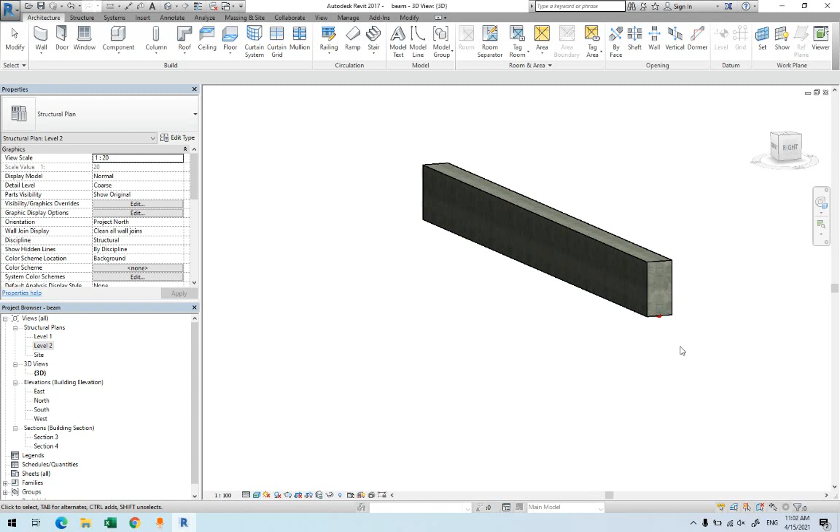Now for this example, for this purpose, we have a beam. Doesn't matter if there's column or other things, we're just trying to place that reinforcement. We have a beam here. Let's say this is the end of the column, this is the end of the column. So let's say I can place

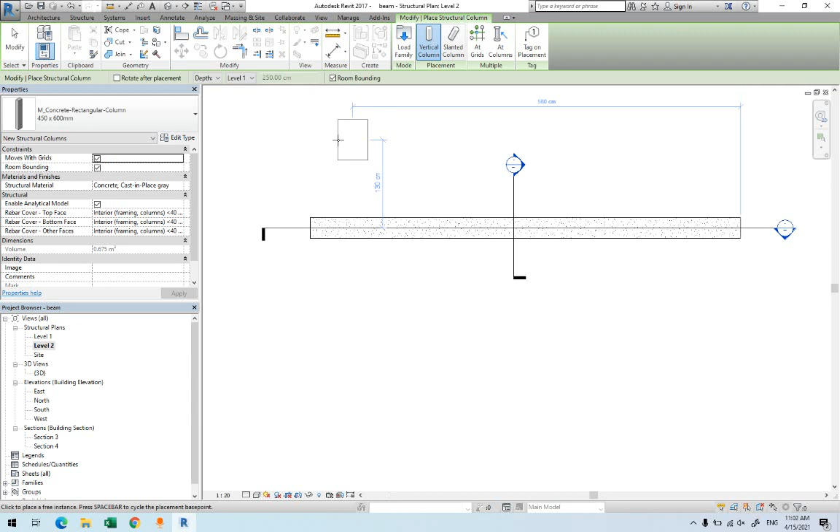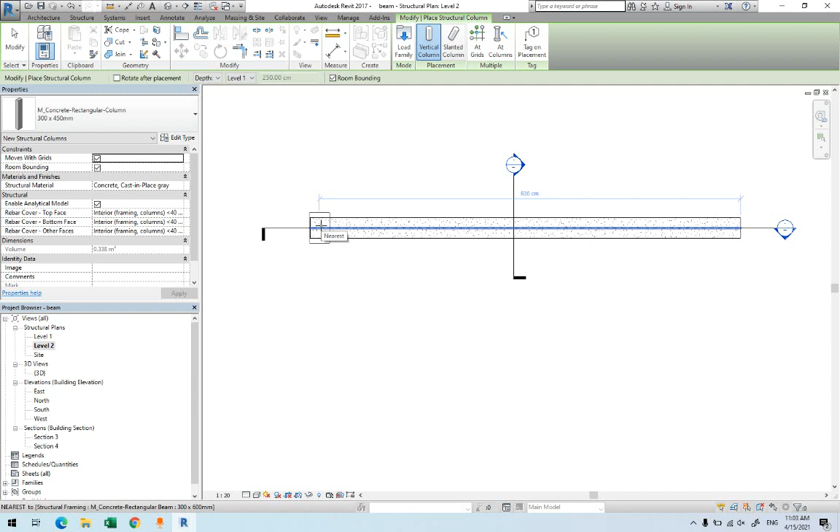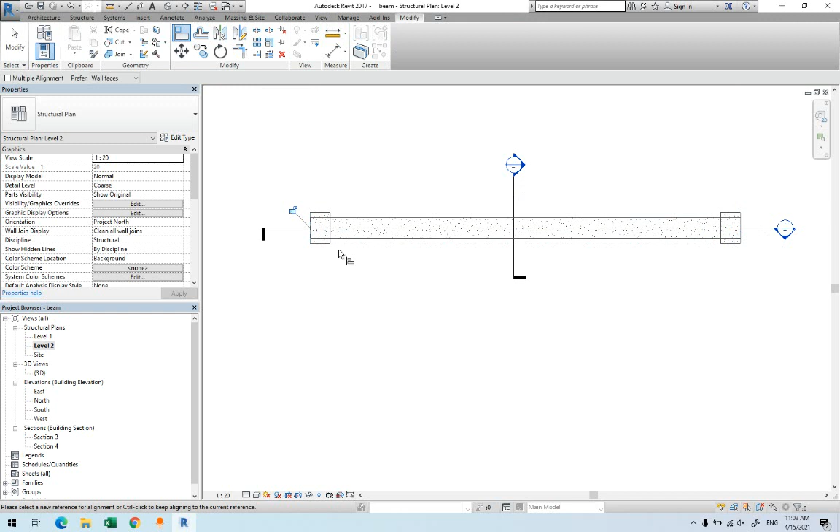and place a column to realize that. So let's say we'll be having a column here. Let's have a column at this point. I'll place a column at this point here. I'm going to use some alignment. And let's say we have a case like this, and still more alignment.

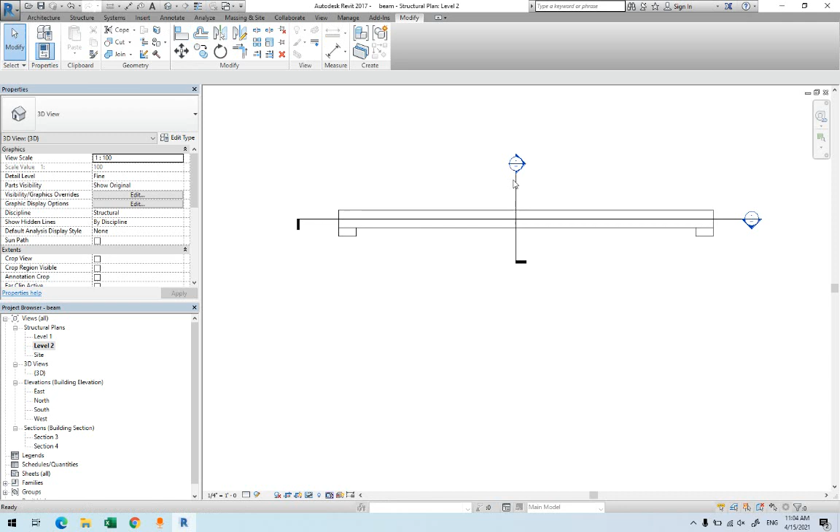Let's say this beam is going to continue to the other direction, but the idea is just to explain that you have a beam on a column, and those beams will continue the other direction as well. Now, as usual, we're going to start by placing some sections. One section goes through the beam in two, one is longitudinal, one transverse.

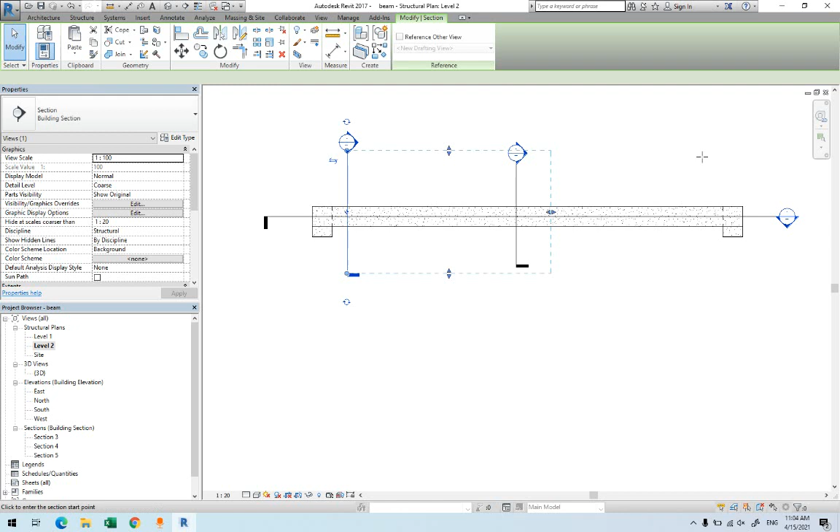You can place three, indeed, because of the negative moment, to provide one at this and one more at this corner later, because we're gonna provide those details on the plan, so we can have three sections like this, because of the positive moment here, two negative moments, and one within the beam. So I'll be having some sections here.

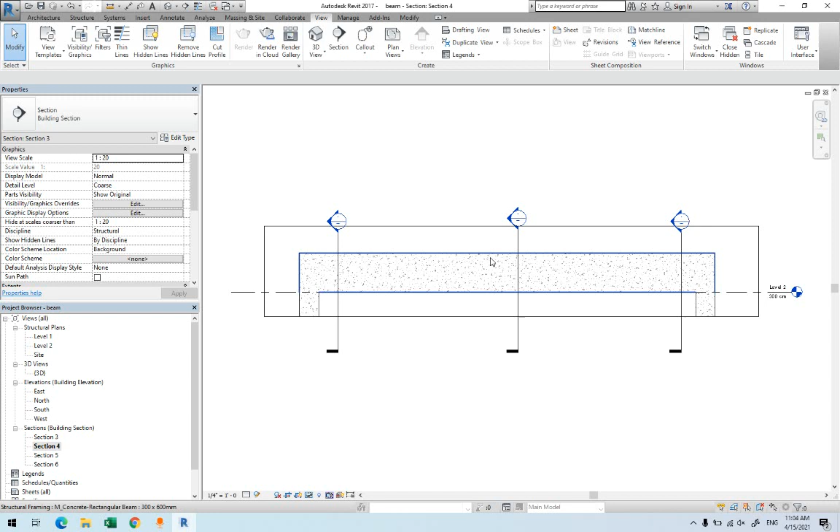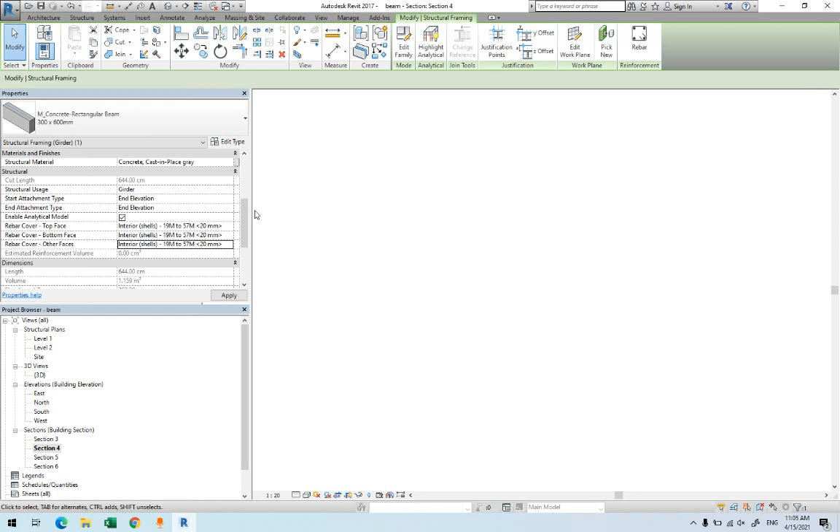Now, the section that we'll be working with, section 4 here for me, is the one within the beam. Now here is the easiest one. I have the columns, I have the beams. I can provide the reinforcement within here. First things first, the cover. So the cover, let's say the cover that you have is 20 millimeter provided here according to the detailing that you have. Say you provide the cover here, then you're gonna go for rebar,

well, here we can provide the stirrups first. As usual, we provide the stirrups first, then we provide the longitudinal bars. It could be vice versa as well, but it's better to provide the stirrups first, which will be easier for the main bars. So you're going to choose the, what's the difference between those? Those are the hooks that are different. This is a different hook, or one hook side. So I'm going to go for 135 hook.

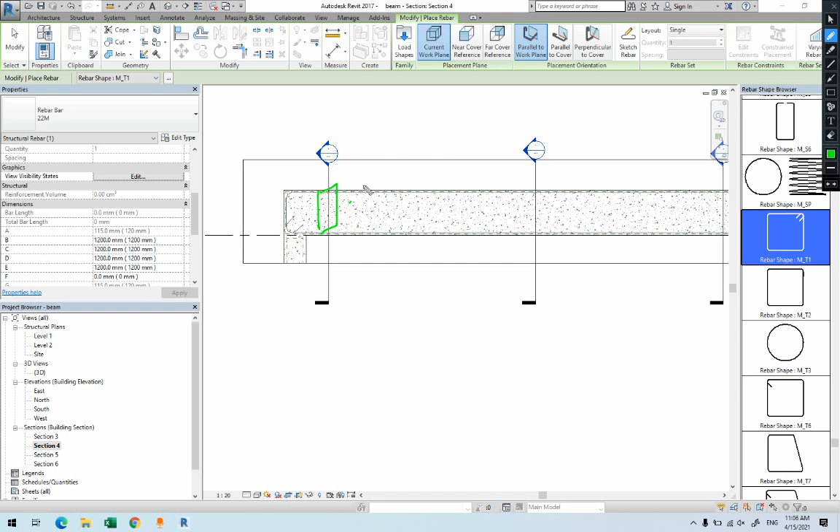Since we are in the section, I'm working with the current work plane. Now, I'm not going to put parallel here, because we know that these stirrups are going to come in this manner, perpendicular to the view, so we have to select perpendicular to the cover. Why? Because the stirrups will be placed in this manner, perpendicular to the view. So you're going to change this one to perpendicular. Now you can see the stirrup will appear here.

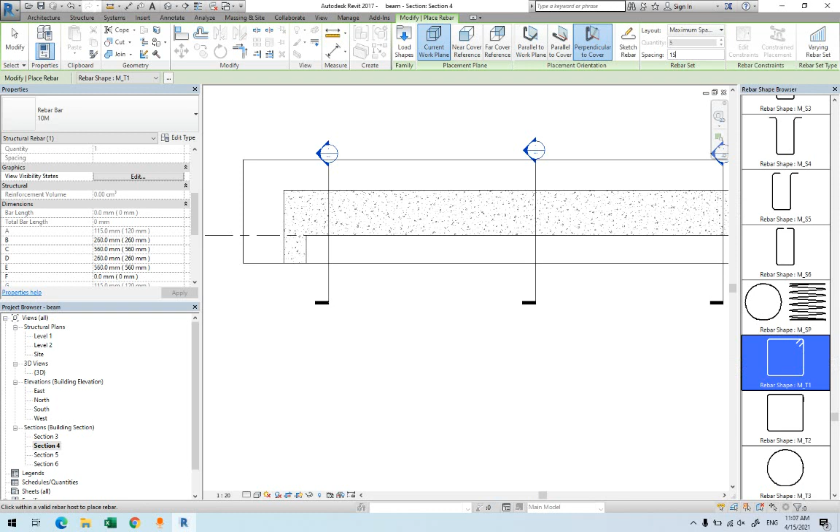Make sure the bar size is 10. So we have bar size 10. The hook will automatically be included. So we have it here. We're going to change the number, so you can go for spacing, different zones, or I can go for maximum spacing. Let's say I have 150. So if I come over the beam, you will see it will start from the beginning of the beam to the end of the beam.

Now if you drew the beam from the face of the column it might start from the face of the column, but it doesn't matter. In any case, we can use edit constraints to tell Revit where those reinforcements will start. So one click to provide the reinforcement. Now, press escape to get rid of the drawing. One click on the reinforcement.

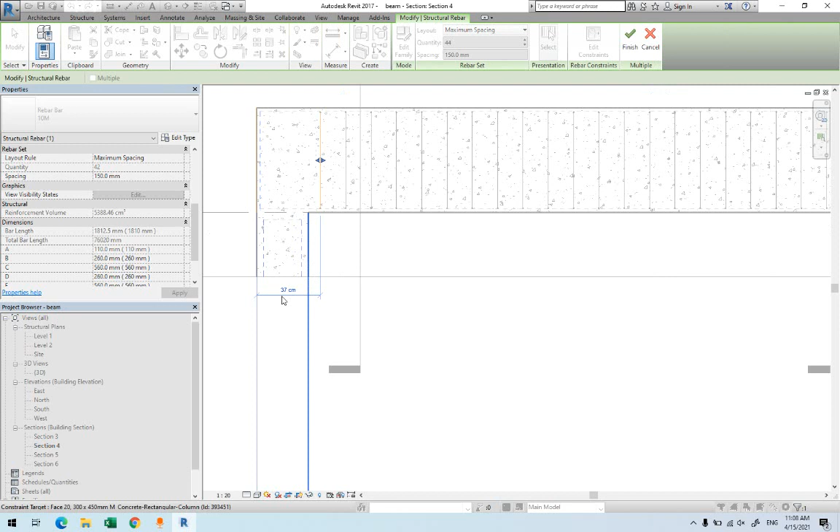Why? Because we want to start somewhere which we know from reinforced concrete, for example, S/2, where the first stirrup is supposed to start. So how can I manage this? This is basically edit constraints. In edit constraints, you will see something orange here, and it tells us 37 centimeter. Now I can change this one. Let's say I know the dimension of the column is 300. I'll make it 35 centimeter. Hit enter. For example, this became 37.

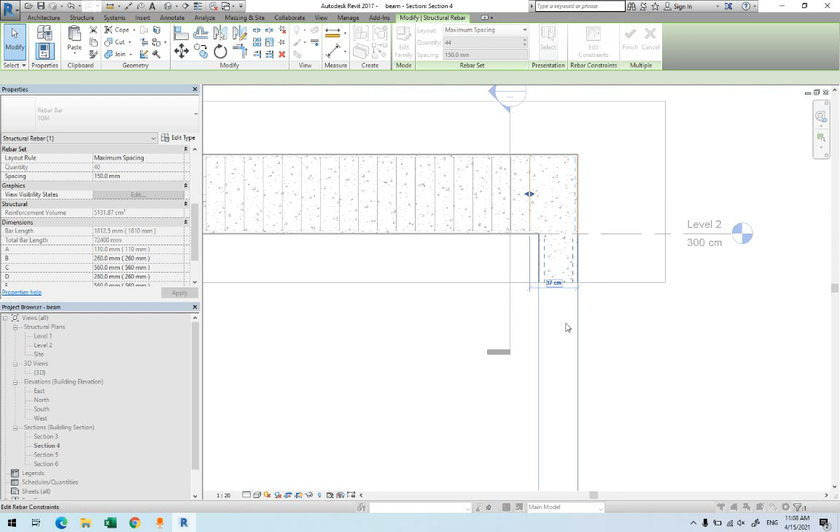Yes, 35 centimeter, in order to start, for example, 50 millimeter from the face of the column. Well, if I want to for the other edge, where is this small button? I can click on it. It will give you the line. Again, you can give the same thing, 35 centimeter for this. 35. It will start 5 centimeter from the face of the column, or 35 from here.

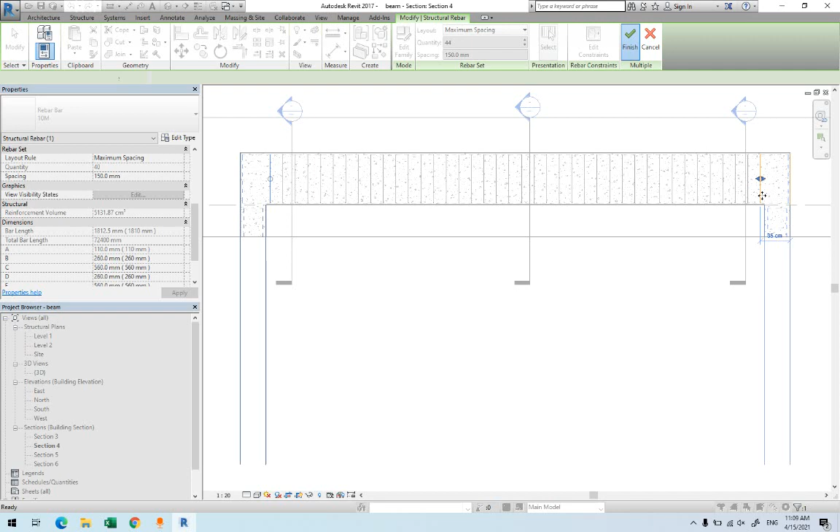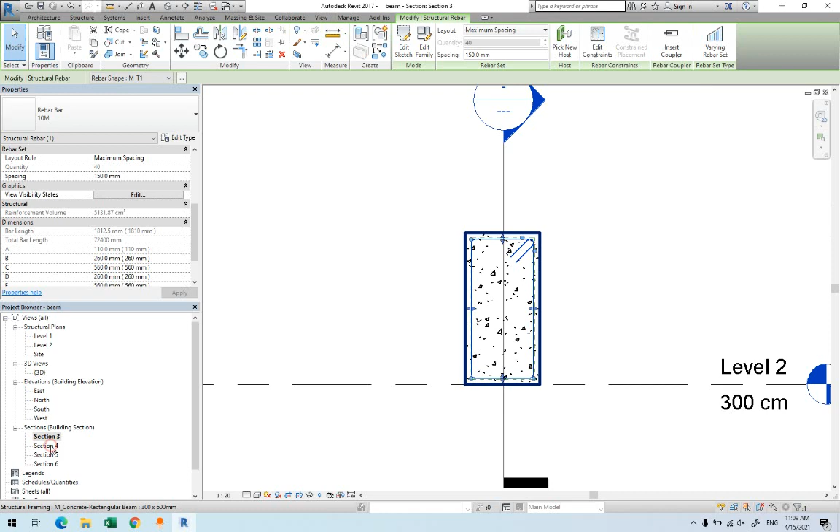Now this is the constraint. Basically, I have it here, and press finish. Now I have the constraint basically set to start somewhere to somewhere. Now to draw the longitudinal bars, I can come inside this section to provide it here. 1, 2, 3, 4. I can place them, or I can even place them in this section. Now I prefer this one. It's easy to provide them here.

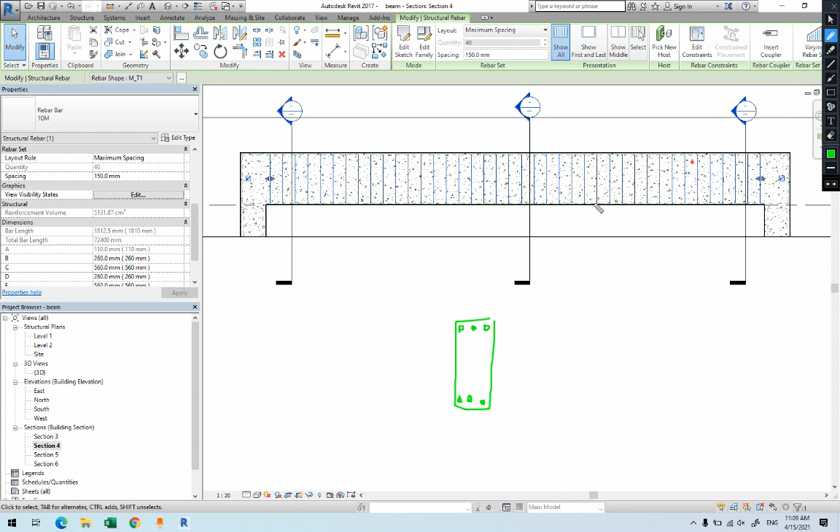Let's say, what do we have? This is the beam that we have. We have 2 at the top straight, 2 at the bottom straight, and we have 1 bent. So the bent up bar will start from here, comes down, goes like this, goes up. This is the bent up bar, and the straights, one of them will be like this, the one that we explained in the videos. So this will be straight lines.

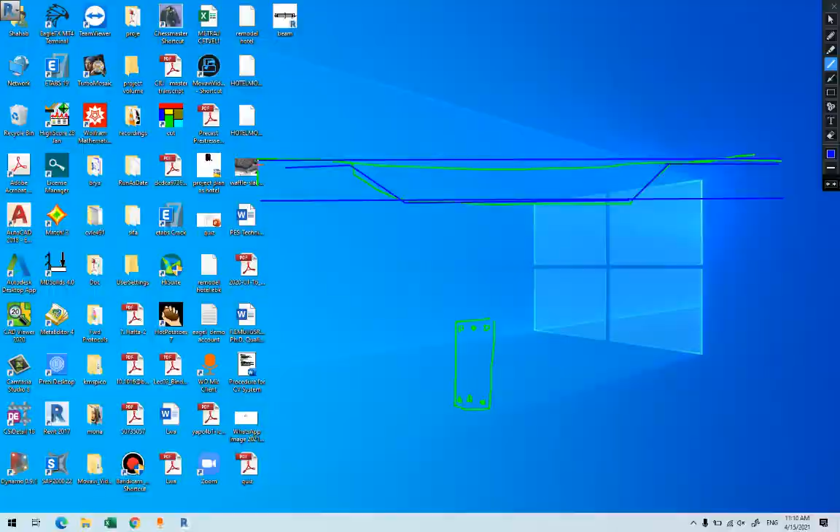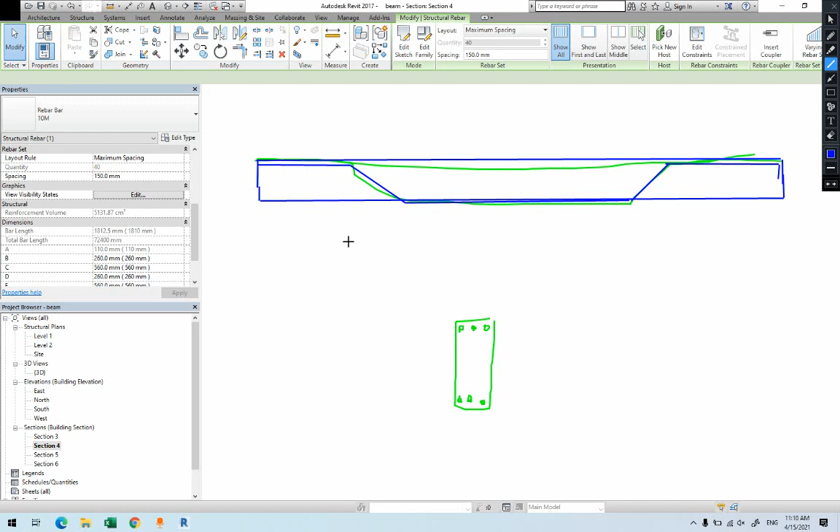And the straight lines, those will be the straight. And we have the bent up bar, which goes in this manner. We can draw this with a hook. Even if we have hook here, we have hook here, it doesn't matter, we can do all of this. In both sections it's possible to do it. Which one is easier? Well, according to experience, you might see this one will be easier.

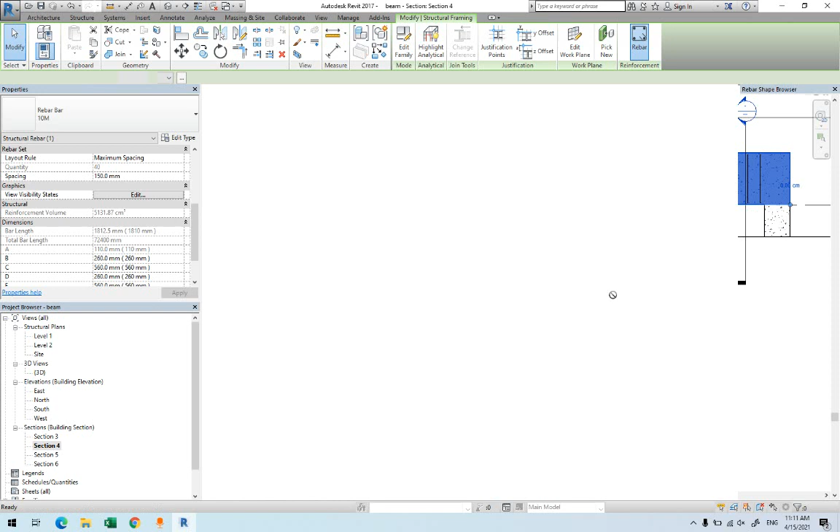Well, start by selecting the beam. If you couldn't select the beam, just hover the mouse over the edge. If you still cannot, just press tab, then select the beam. Then you click on the rebar. Here you can sketch. For the bent up bars, sketching would be easier. So I'm going to choose the bar type. Let's say we have straight with hook. The bar diameter, I'm going to go for, let's say 22, whatever it will be.

Now the hook will be included by itself. If not, we can always change the hook that we have. So when it comes inside here, now I cannot see it. Why? Because it's perpendicular to cover. I'll come back to parallel to work plane. I can see the bar at the top and here. This is by placing the bar.

So how many do we have? Let's say we have 2. Change this one to 2. Then I can just one click at the top. Look, the location of it doesn't matter because we can constrain it later. One click here, provide 2. When I come to the bottom again, one click, I'll provide 2 as well there. Now if I go to 3D,

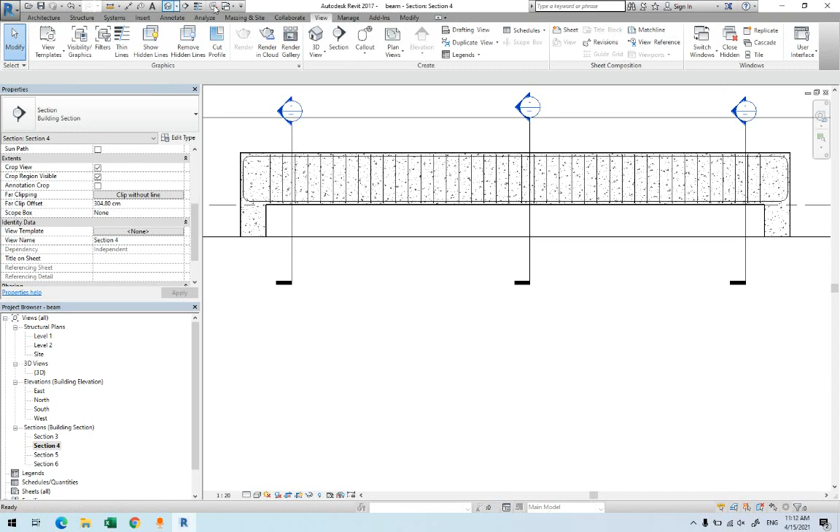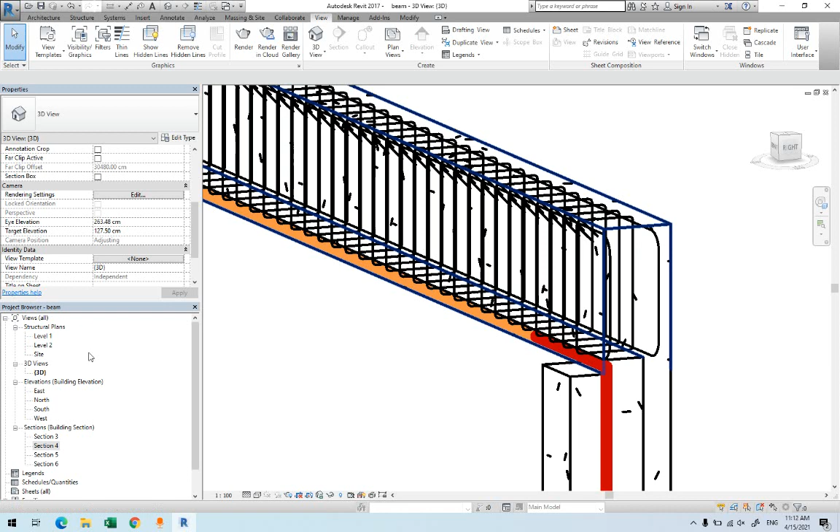I can see we have 2 bars at the top, 2 at the bottom straight, and they have hook, and now we're going to provide one bar as a bent up bar starting from top, goes down. For the bent up bar, if you go to section 3, you will see 2 bars at the top, 2 at the bottom. Now I'm going to go to section 4. I'm going to provide the bent up bar.

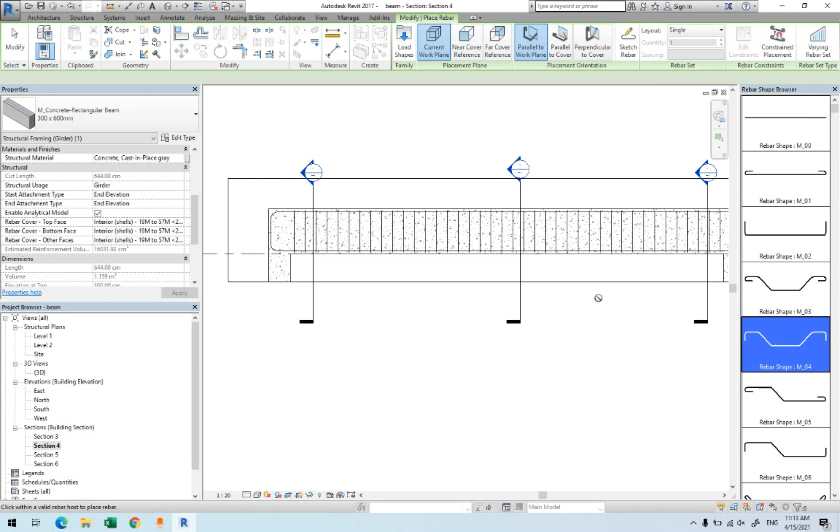In order to provide the bent up bar, we have 2 methods. We select the beam, go to rebar. Now you have the bent up here, which you select from the list here. Now if you hover the mouse over the beam, you'll see that it will provide it, but if it does not go through all the beam, if it's just providing like this for me, in that case I have to edit this one with the dimension.

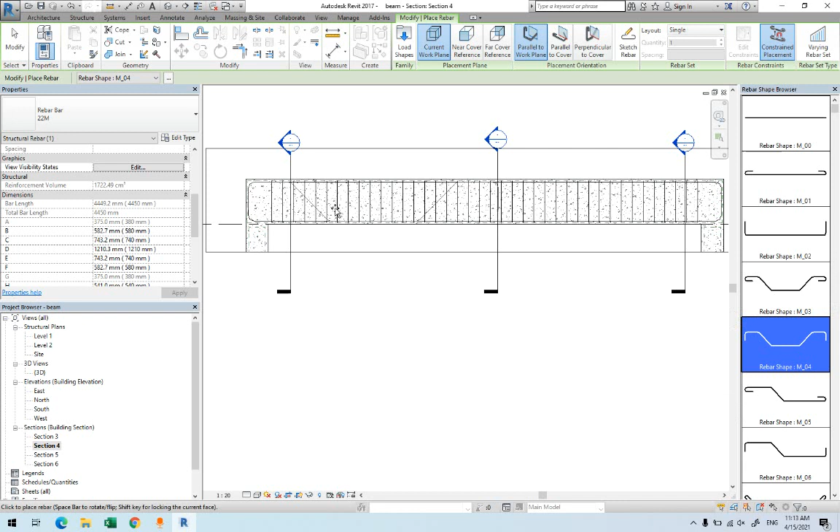Now we have different bent up bars, so whatever the case that you have there, you'll place it. Sometimes you have one side or with 180 hooks, it's possible. Now placing this one, it's the same manner. Where is it exactly? You cannot see it, yes? Is it in the middle? You don't know. So if you place it here, for example, I placed one here. Well, it is not exactly what I want, because I want this one to be somewhere at this corner here.

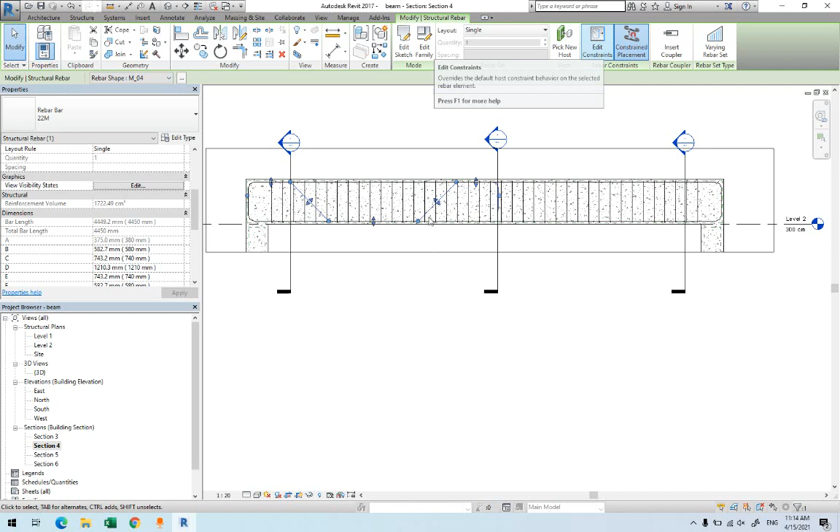So I have to manage this information. Well, first we will edit the constraint. So I clicked on the bar, edit the constraint. This is the constraint I want to fix here. For example, this one here. Let's say to start with 2 centimeters for the cover, 2 centimeters from there.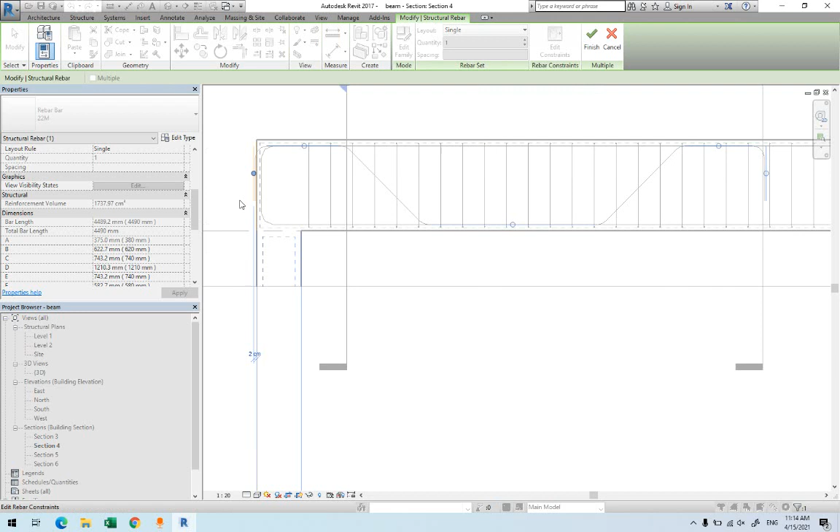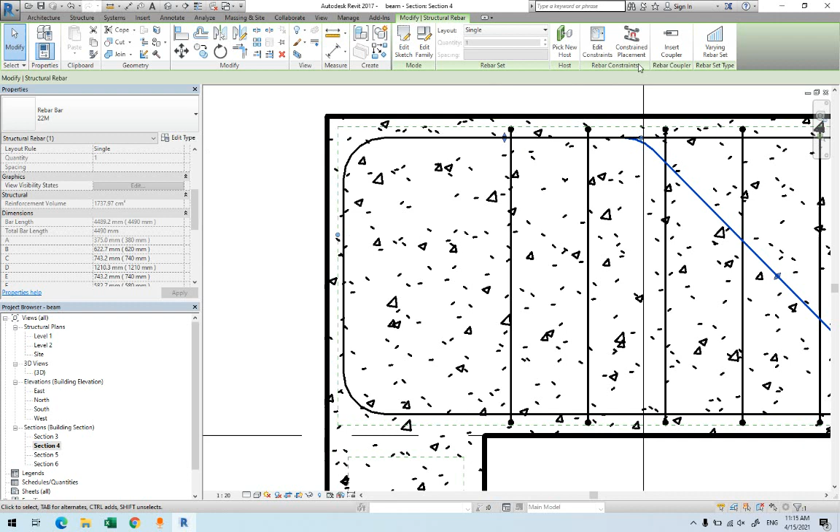2 centimeters. Sorry, I think it was restrained to the bar, so just cancel it. It's already restrained to the bar by itself here. So I'll go to edit constraints. This is already restrained with the cover, so the restraint is okay. It's already fixed there. Now I'll make this one restrained so that I can change the rest of the dimensions easily. So finish here.

Now with the dimensions, if you remember, we said that each of these represents something. This dimension here, this dimension here, and this one here. Now you don't change those two because they will already be calculated according to the cover and the height of the beam, which you have here, 700. This one was the same thing as here. Of those two that you have, they will be those. Let's see if I can

I think I don't have the photos here to show it to you, but anyway, we'll just go over these dimensions to change them. So I can change those dimensions here. Let's say B, I'll change this one to 1000 millimeters. You apply, and you'll see the change will happen. So let me just clear the board here. I can make this one 2500.

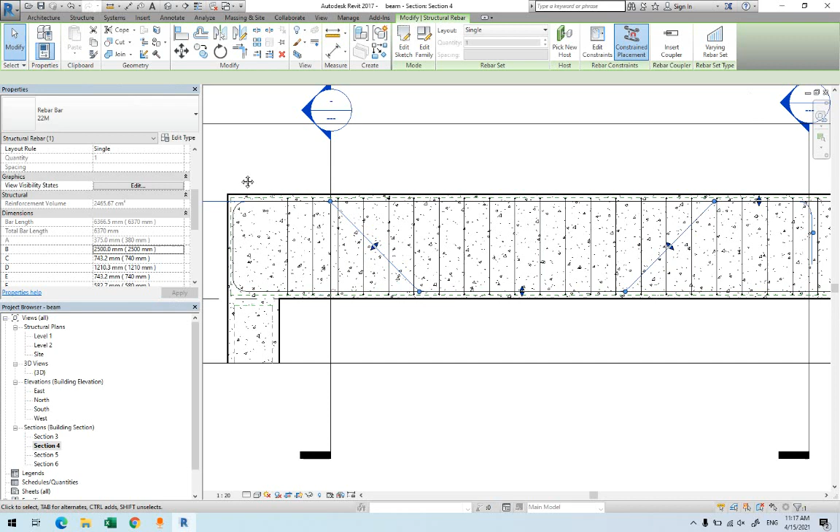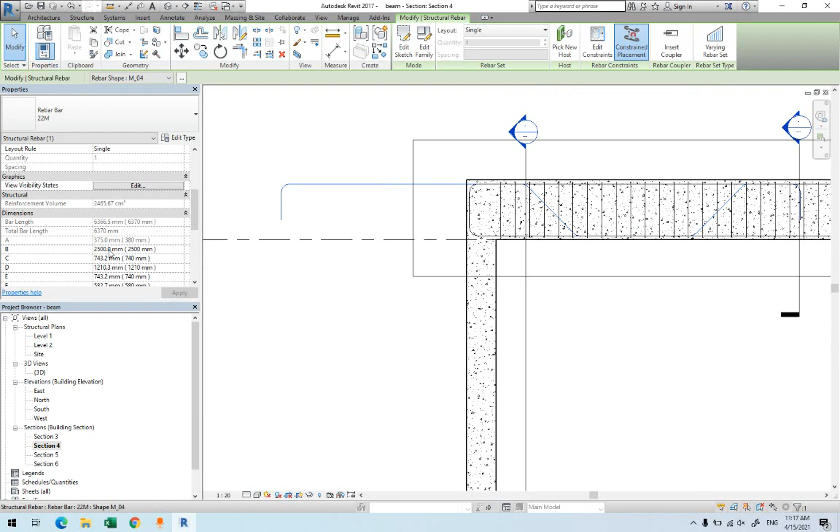So let's hide this one here. I went out of the beam here, so I'm simply bringing it back. I can manage this dimension. Let's put all of them first, then we will change the location. This part here, I don't know exactly how much it will be, but we'll try. In the drawings you'll have all those dimensions specifically. This one I'll go with 1750. I'll do the same for the other side, 1750, and whatever comes for the middle I will leave it. So I provided these 2 dimensions here.

Which one did I provide? This one, and this one. Now we have the hooks, and those will automatically be calculated because of the depth and the 45-degree angle. You can calculate it yourself. Within the drawings you'll be able to see these values, and the remaining will be for the middle one. So if you provide this one and this one, you don't need to provide the middle. Remember, those letters will change according to the reinforcement you have, but you'll see the values there and can change them accordingly.

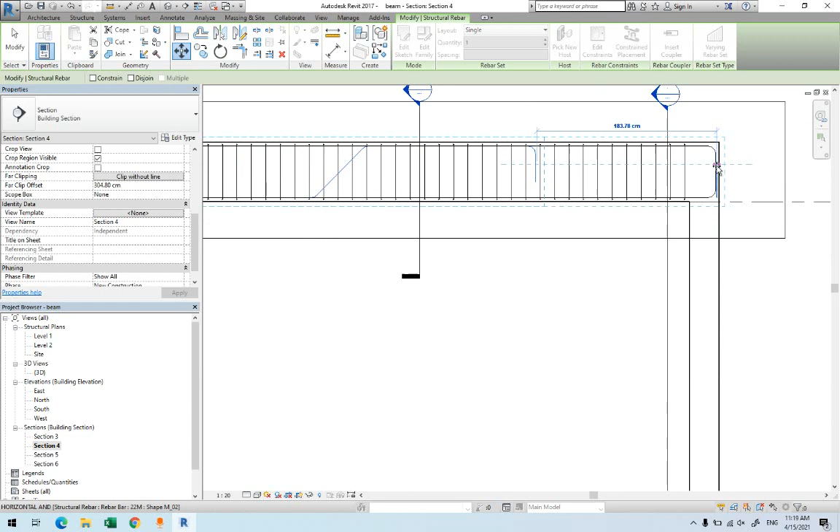Now I placed those, but I have to place it somewhere. Maybe this is not enough for the beam, but trying to place this one, I can move it and bring it to the face of the cover that I have there. But still you see that the dimensions I provided were not enough, something unrealistic, because I didn't know exactly how much it is. So you have to manage these values. Let me see how much remains so I can add it to the middle one.

But you're not going to face this because you will have the full detailing with the actual dimensions, so you'll know exactly what the dimensions are. Let's say I'll add 67 centimeters to the middle one. So in that case I can move it and place it. As I said, when I give you the detailing, or you have the drawings, you can directly put the dimensions there. It will fit, so this is the bent up bar.

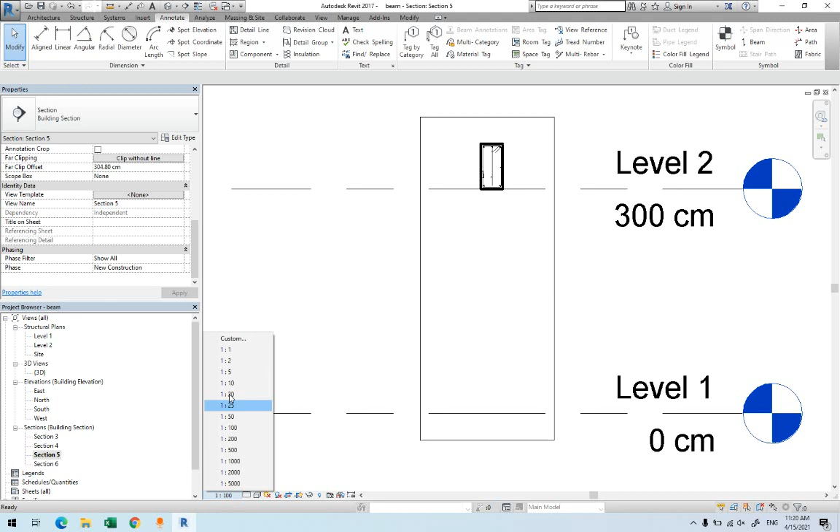It is not okay yet because I have to go to section 3.3 to see the exact location, if it's in the middle or not. Look, it's in the middle. Why don't I have it at the top? Because in section 3.3, it's in the middle, so the bar will be at the bottom. If I go to section 5.5, I can manage these sections. You see the bar will be at the top here because it's negative there. Section 6, same manner.

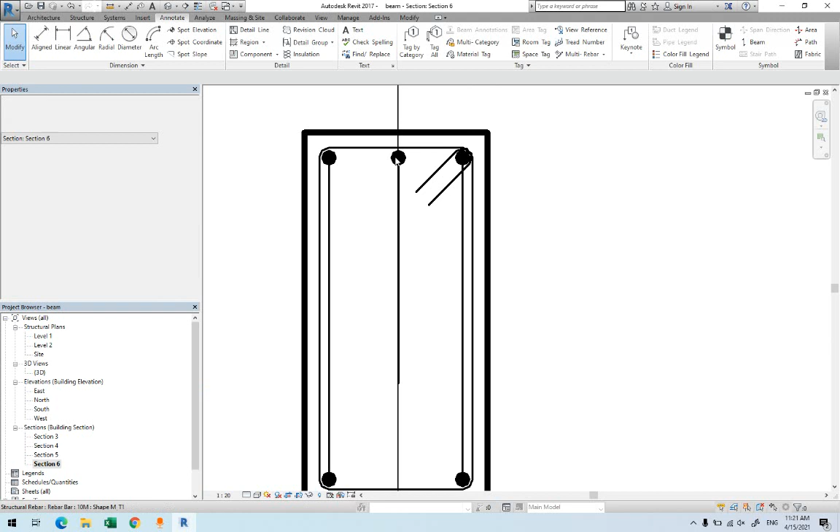Also the reinforcement will be at the top because of this negative moment there. So this is how you can provide it.

Now if you don't like playing with the dimensions, as you can see here, if it's hard for you to manage this dimension, I recommend you go with sketching. I can manage this one with sketching, it's also possible. Let's say I delete this one. I can also draw this bent-up bar with sketching.

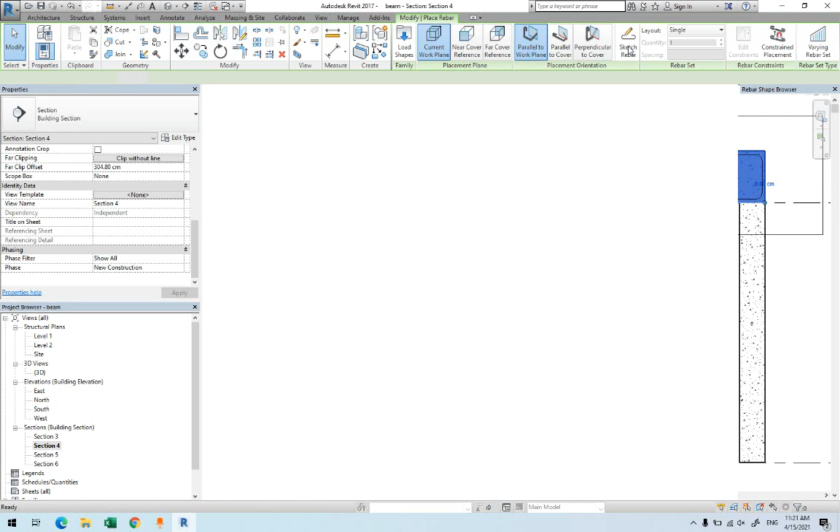So I'll select the beam, rebar, we'll go for sketch rebar here, then we pick the host, which is the beam again, then it will give us the detail for the drawing. Start with a line, so I'll start somewhere. I can combine them together, no worries, because it's a one-time drawing.

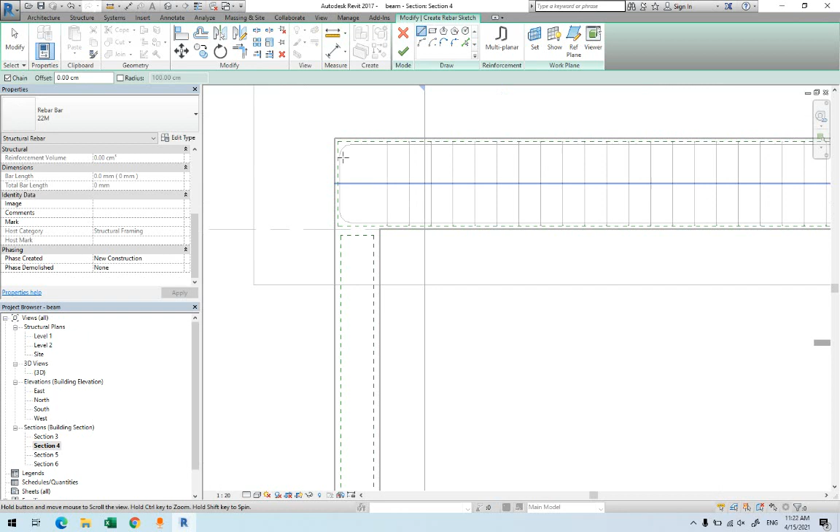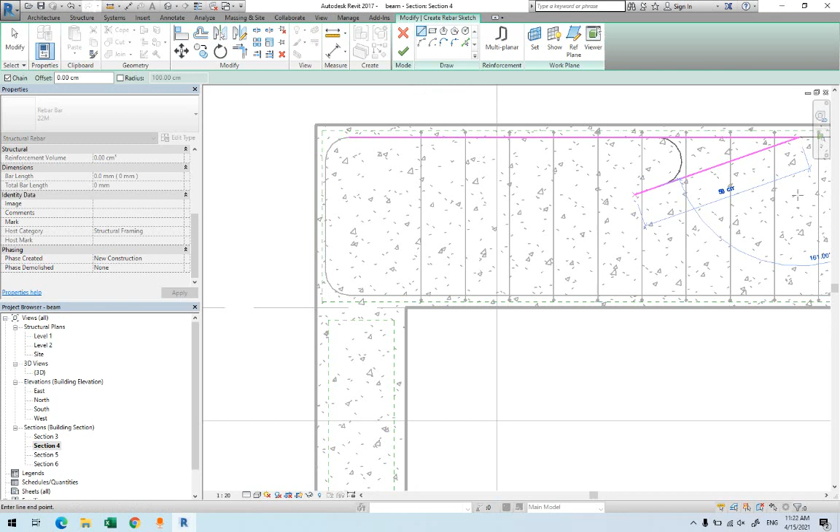So when you draw, you can start anywhere. Let's say we start as a bar. I can start from here. I'll go like this. Let's say I know the dimension here is 150 centimeters. I draw one line, then I can go down with an angle of 45 till somewhere here. The angle is 45.

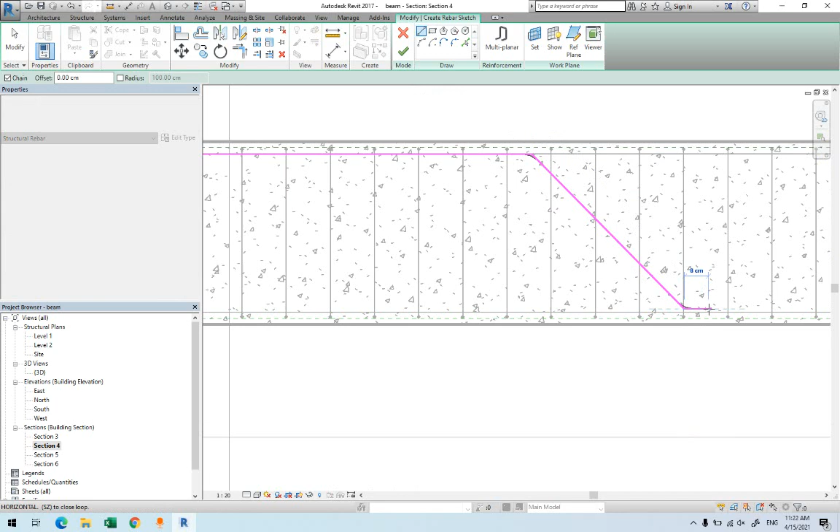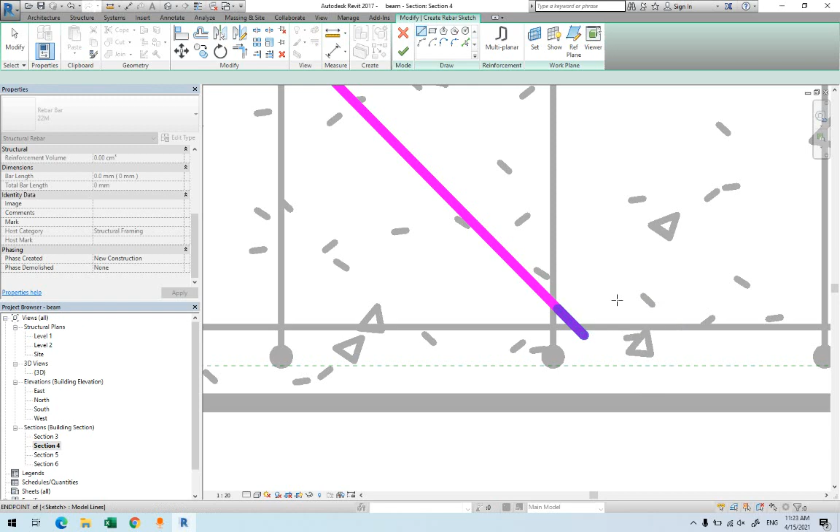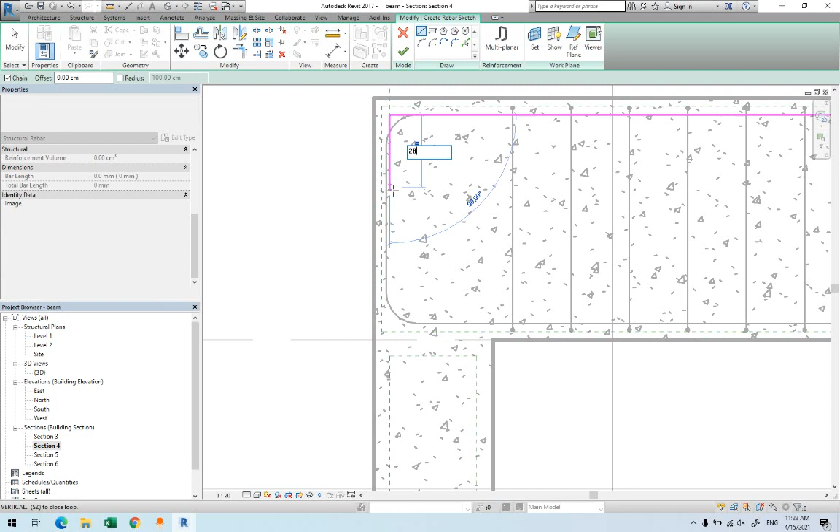So I'm going to come back here and give the hook here. I will go exactly to the edge of this, 7 centimeters. Then I can bring it down. It will give the hook by itself. Let's say I have a hook of 28 centimeters. Now, if this is still not okay, we still have align. I can use this one or this one. You can align it to that.

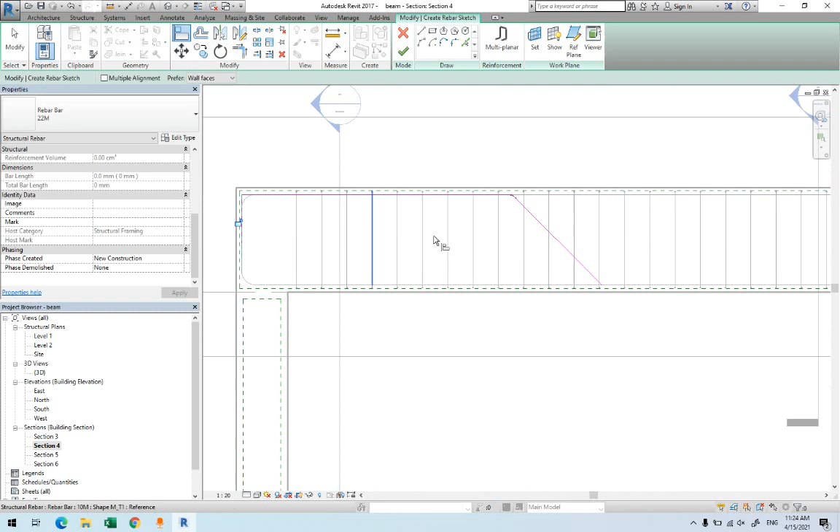Then I can mirror this one to the other side. If this is one side, I can mirror it, you know, mirror from AutoCAD. I can mirror this exactly to the other side. So I have mirror, I have the line. Select this, the other line with Control. So I'll select all the lines that I drew.

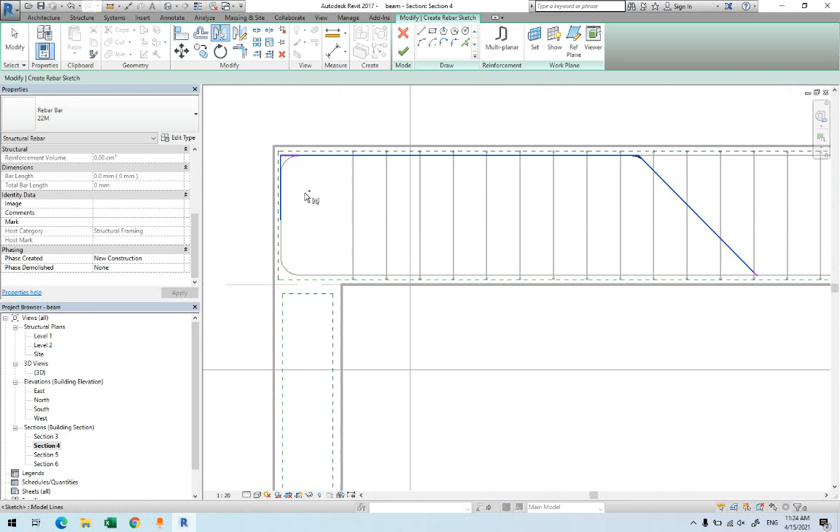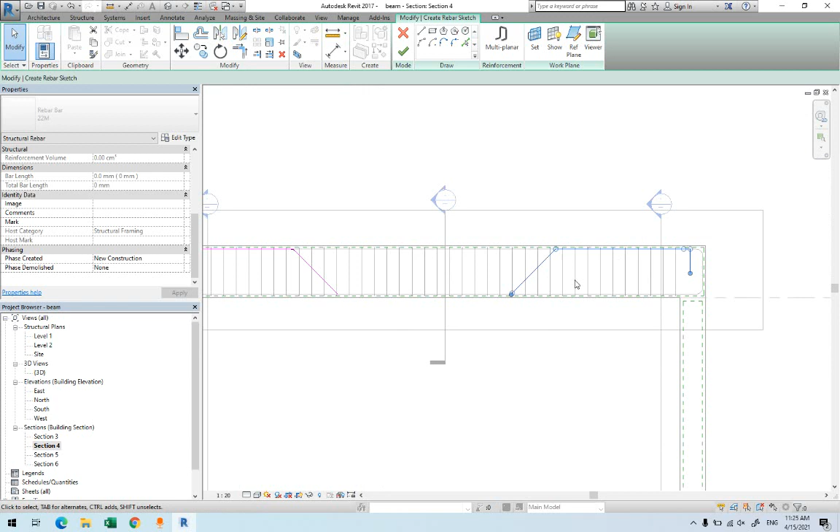I'm going to select this line here, and a small line here, selecting that one as well. So I have the lines. Then I'll pick... I think it was better to choose the other one. For the axis, I'll draw an axis somewhere around here. It will go to the other direction. If you draw it exactly in the middle you can, but I'm just going to move this one.

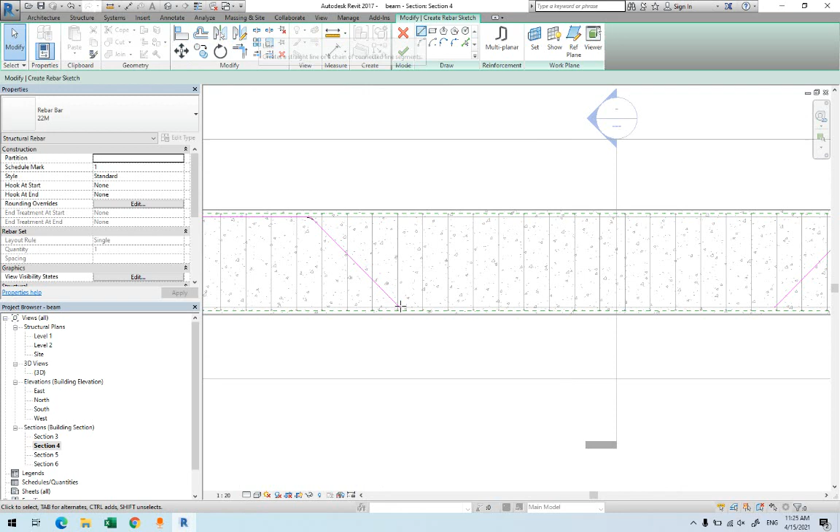I could go for the detail line in order to bring this one exactly and find the midpoint. Now I have this one, I need another line here to connect this. I can draw this line somewhere here. Later I can just combine them together, or extend it. So I can draw something like this, that's enough.

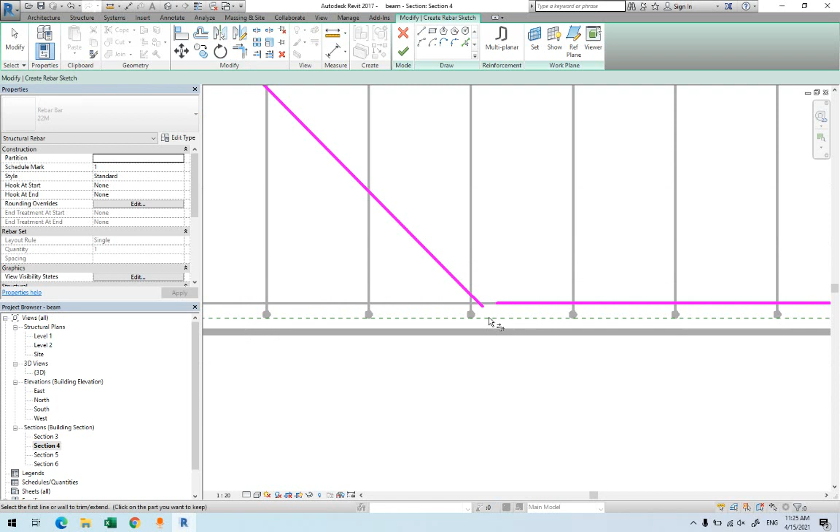We use this option, extend and trim, to make sure those two are connected. I can click on this one and this, and it will be connected nicely, exactly on the line of the bar. Same thing here, I can click on this small line. Let's say I don't draw the small one, still okay. Let's say you decide to just draw a part of it.

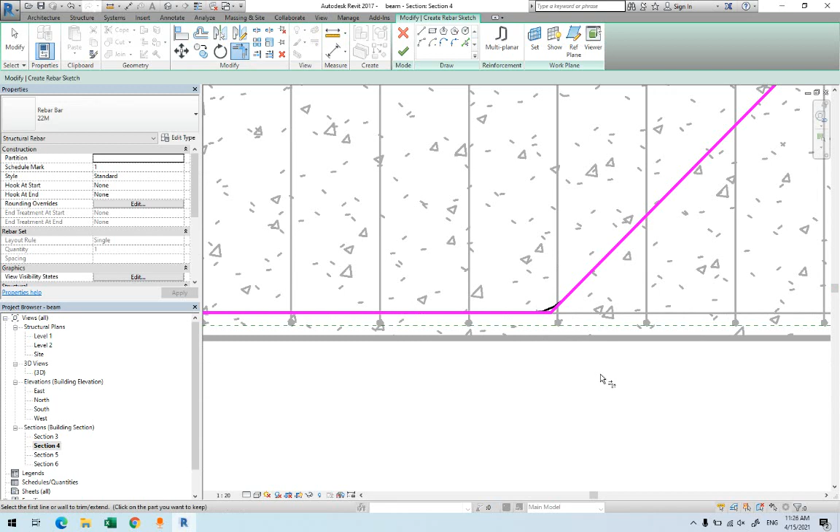Even this one, you don't know how much it is, leave it somewhere here. As we explained in AutoCAD, extend and trim is useful if you don't know the exact dimension. You can just click here and it will combine them together by itself. So this is the drawing. We press OK. Now we have the bar.

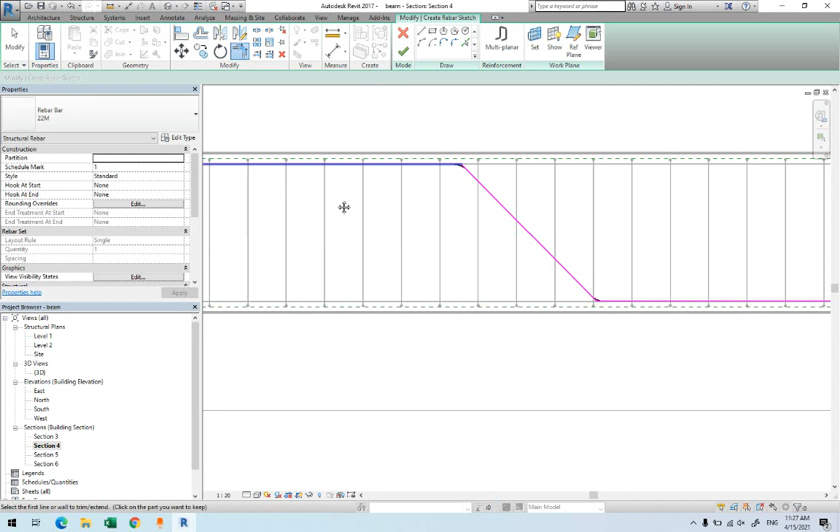And there is most probably a gap somewhere, in one of the places. Okay, I believe this small one is making a problem here, so let me delete these small lines and combine this one to this. You will have a curve here. Then that corner as well, to make sure there is a curve. It's supposed to have a curve at the corner because it will be a continuous bar.

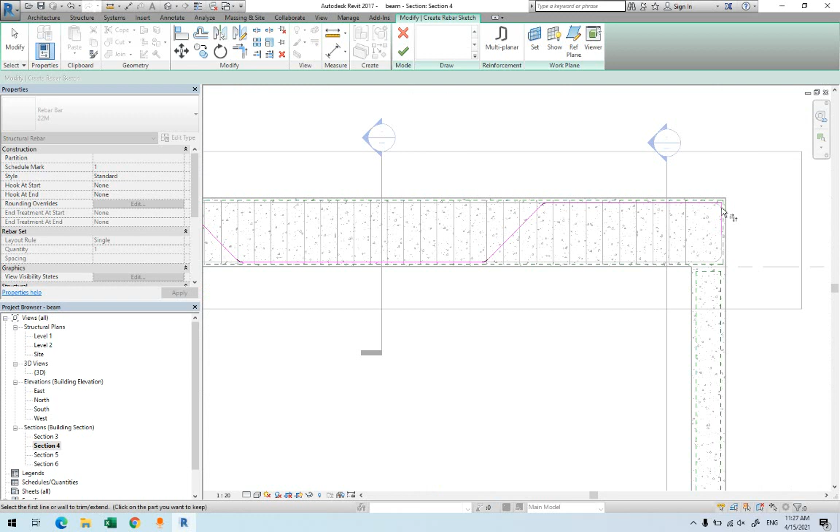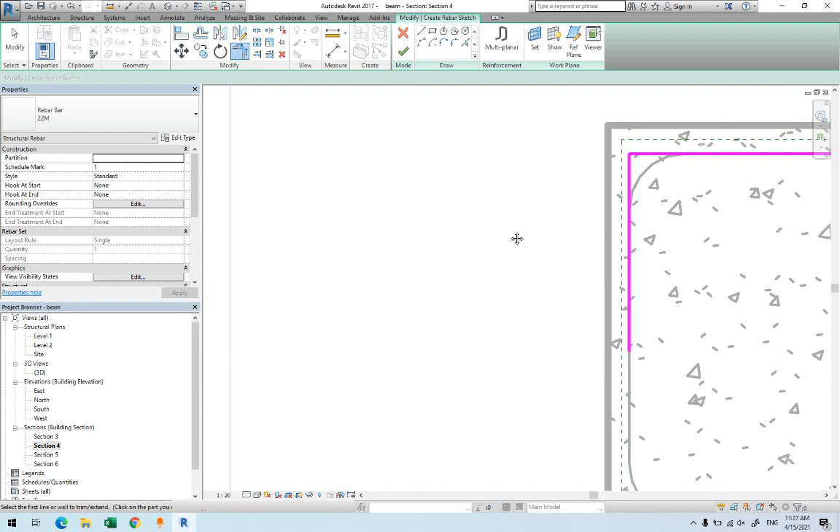Still have some problem. Okay, I'm going to delete this corner here. Then we're going to combine this one to this and do the same thing for the other corner. Hopefully the drawing will be accepted.

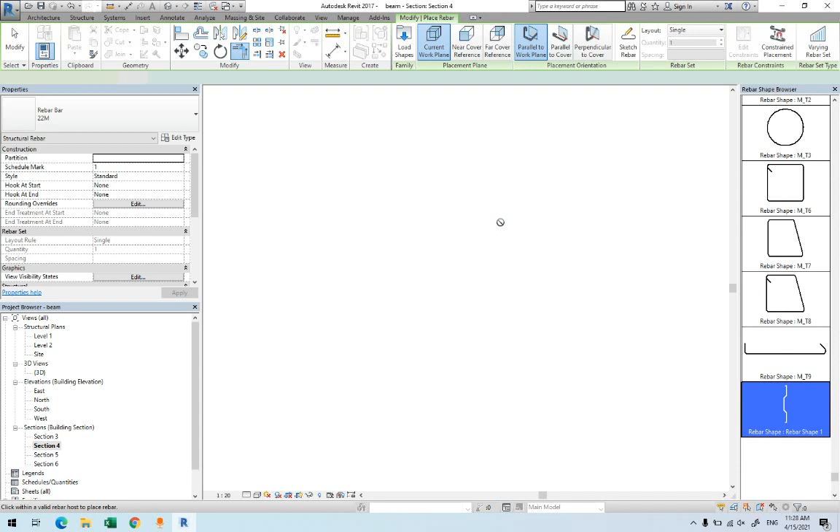So those are basically the small corners we have. Due to the bending, we had some problem. Now we have the bar, but we have to know exactly where its location is. Where is the location of the bar that we have? So where do we go? We go to the section. In the section, we'll see if it's exactly in the middle or not. This is in the middle.

So we have the bent bar drawn by us with a sketch. If you would like to draw with a sketch, you directly put the dimensions and you draw using trim, move, mirror. You can do it, or you can go with the default one, where you have to play with the dimensions within the properties, the A, B, C, D, E letters, in order to make it exactly the same way that we have it.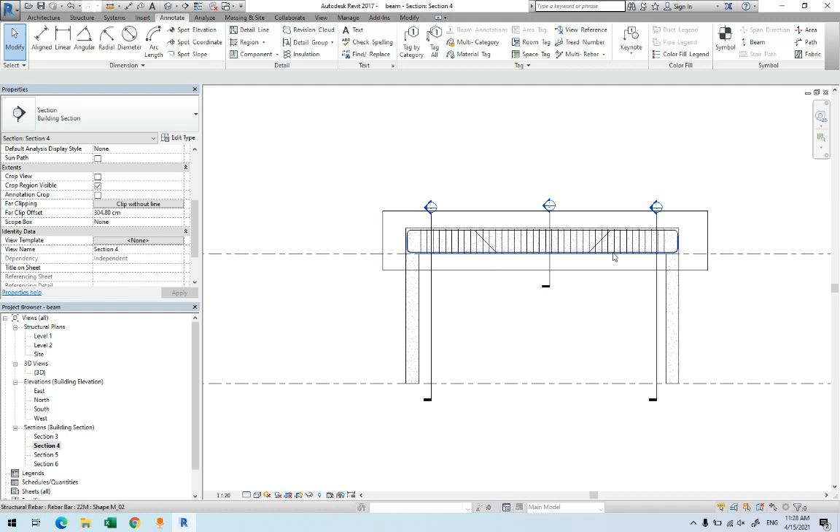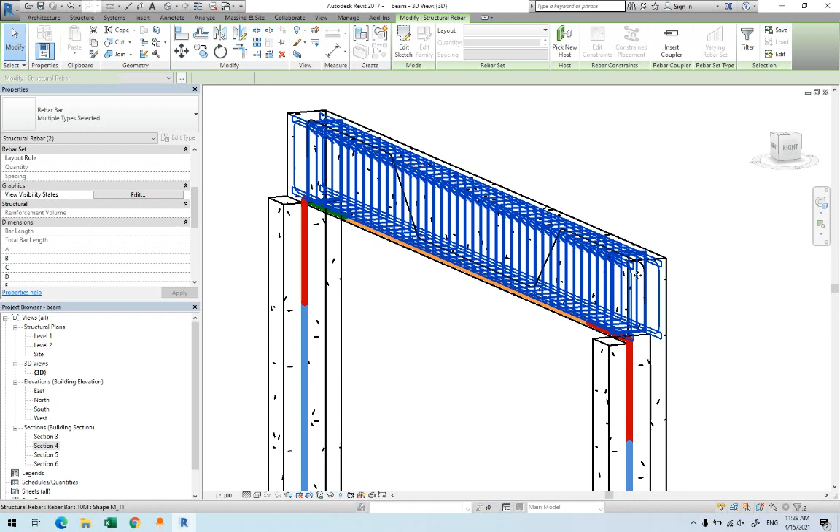This is how we're going to model reinforcement in the beam. So in the 3D view, you'll be able to see this is the bent bar that's going through. Remember, if you want to make those bars thick, you have to click on them. Then within the visual graphics, you can select all of them. With Control, you can select all of them. Let's say you select all the bars. Select also this one as well. Select all the bars.

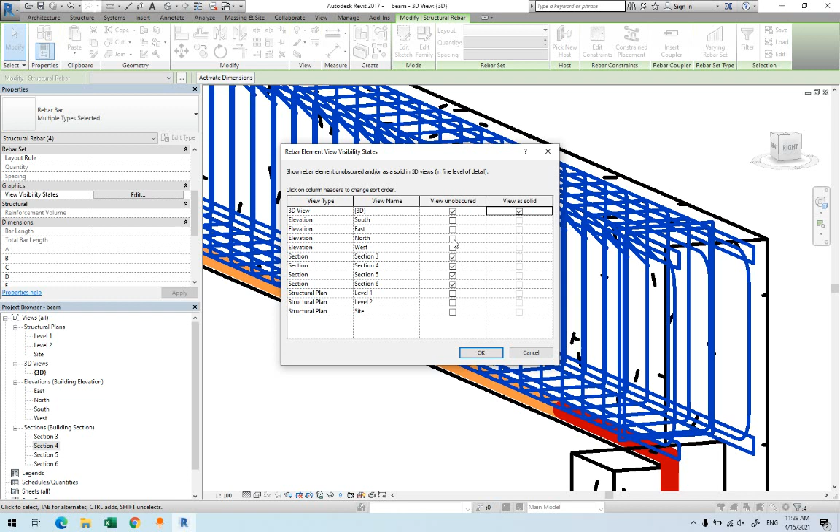Then I can go to view visibility state to make them, for example, solid in the 3D, and also to show them in the section. Already have them here. Section and elevation, if I want to see them, still possible. So I'll just press OK. I can make them solid here. I'll change the view to any of the others. You'll be able to see the reinforcement.

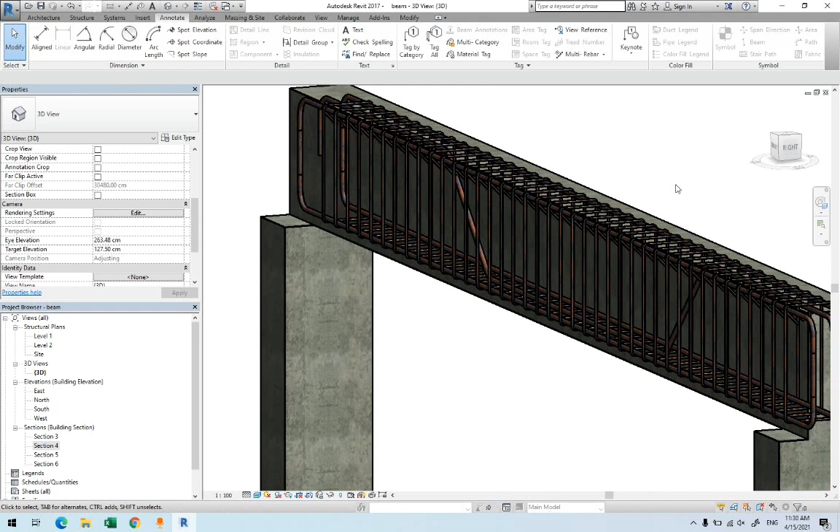You can change the color. This is given by the color of the material here. You can change the material color, and the coloring will change as well. This will be enough for the beam.

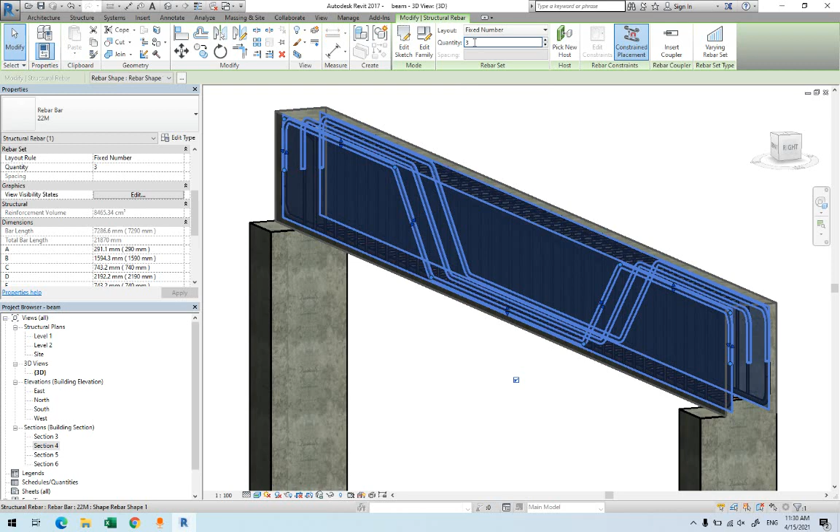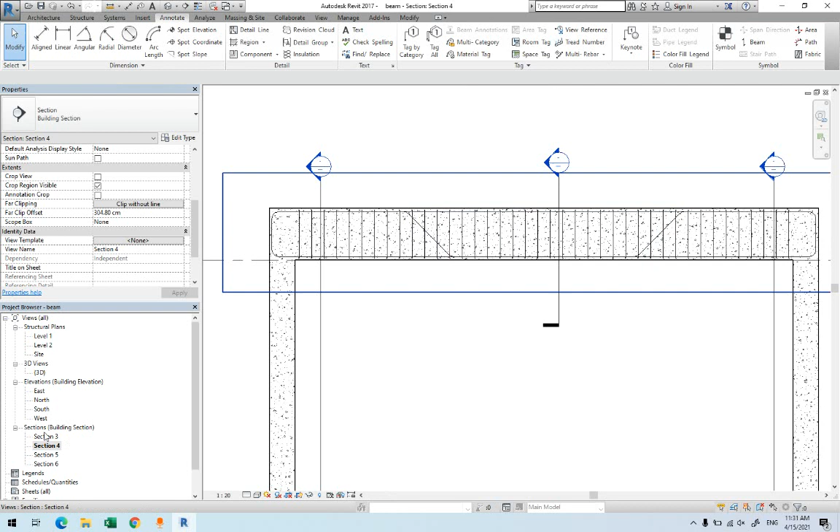So you may have a different number of bent bars; you can still change it. For example, if the bent bar that I have here is more than one, I can simply change it from here. Fixed number, I can make it 2. Now look at them. If I change to 2, they're not placed in the right location. That's why we have to go to the sections and change this. This section is okay, but in the other section you realize that those bars are not in the right location. So you have to move them to bring them where you want.

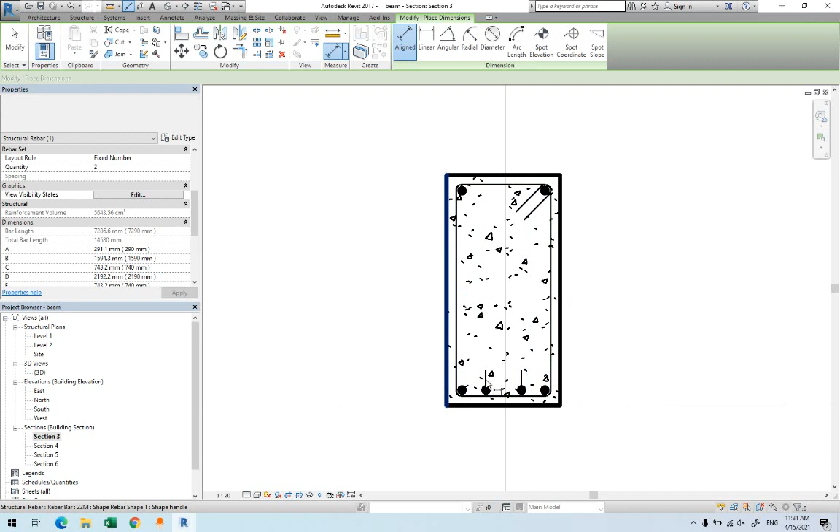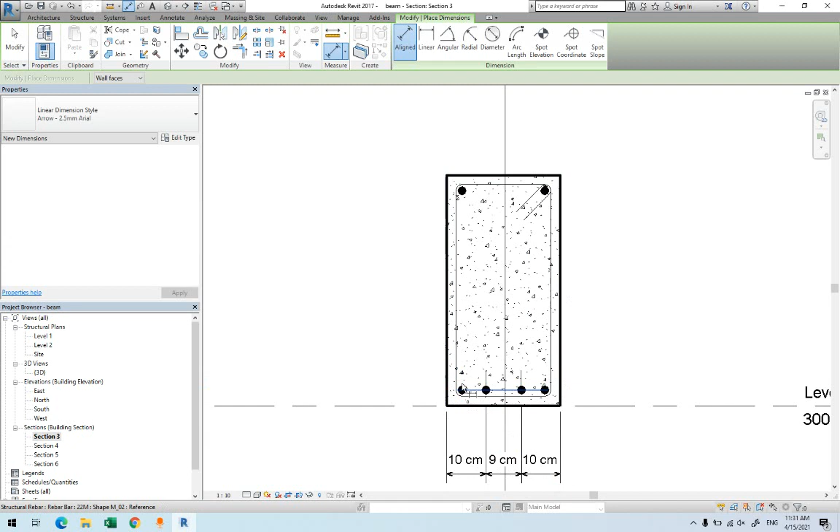So with that, I recommend you go with annotate in order to make sure that you provide equal spacing for them. For example, I can go with equal spacing here. This is 10, 9, 10. Let's see the spacing from here. Or I can provide even spacing between the bars here, because sometimes you have spacing between the bars. But from here till here you can provide equal spacing. For example, 6, 9, 6. And you will manage that.

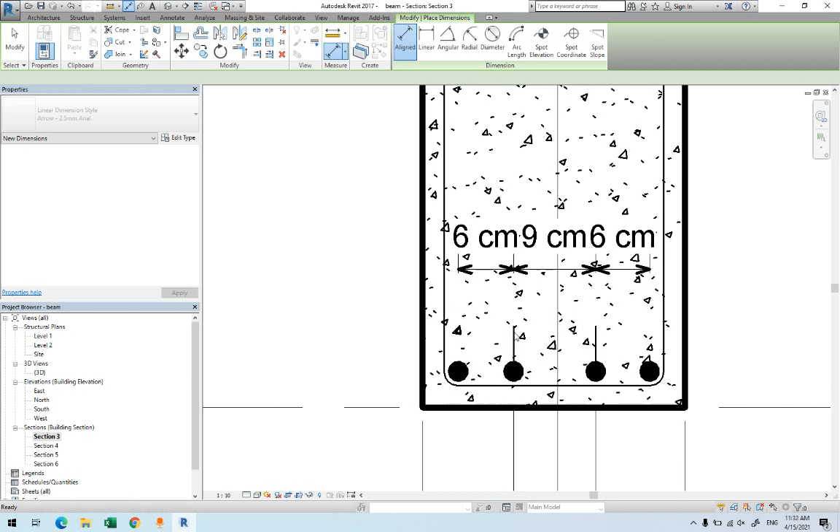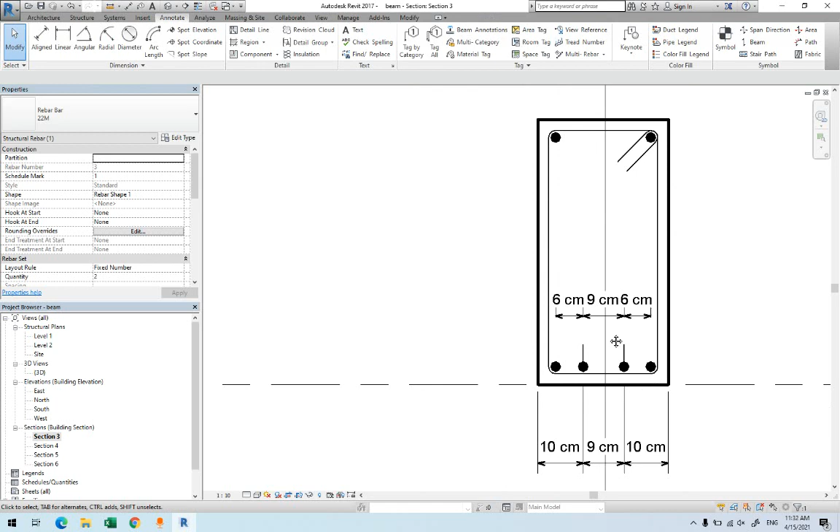So how will you do it? You click on the bar, sorry, press escape. You click on the bar, then those will be active. When they become active, you'll be able to change them. So with 6, 9, 6, in that case you can make this one 7, 7, 7. So you can change them in order to make them similar spacing. I will not go for this detailing here.

This is when you want to change the number of bars. It might not come exactly in the center, so always check within the section to see if they're located right. For example, this is from the top. What are those? Those are the hooks that we have there. That's enough for this video.